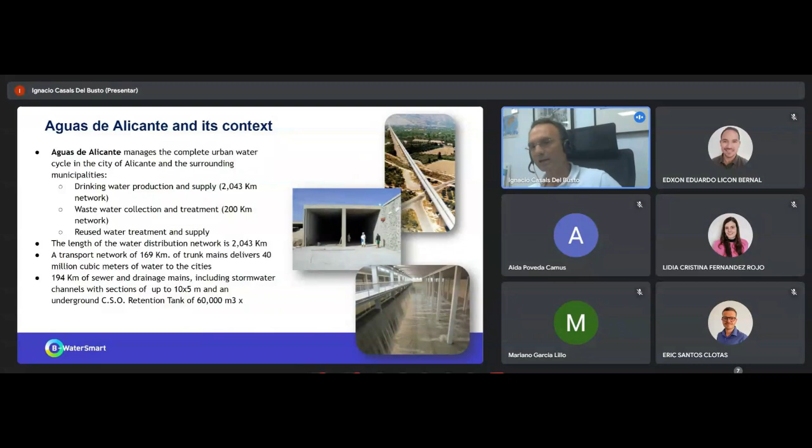The length of the water distribution network is roughly 2,000 kilometers. There's also a transport network of 170 kilometers of trunk mains, which deliver 40 million cubic meters of water to the cities. And there's a sewer network of more or less 200 kilometers of mains, including stormwater channels with large sections up to 10 by 5 meters, and for example an underground combined sewer overflow retention tank of 60,000 cubic meters.

In the B-WaterSmart project, we have focused all of our pilot efforts on the wastewater treatment plants. Alicante has two wastewater treatment plants. The Monte Orgegia plant in the south of the city has a theoretical capacity of 60,000 cubic meters per day, with an equivalent population of 200,000 inhabitants.

It has a conventional aerated biological treatment plus tertiary treatment for water reuse and disinfection. In the sludge line, it has anaerobic digestion and cogeneration, with a biogas production of 0.8 mega cubic meters per year, and it produces 11 hectometers cubic of water per year of reclaimed water.

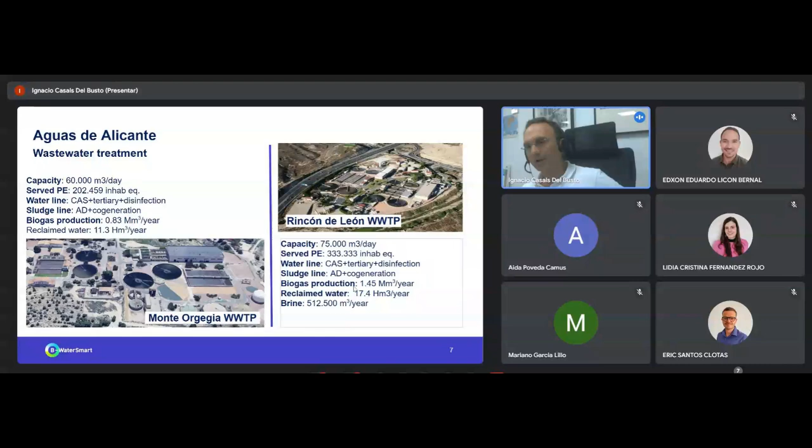Especially in the case of the wastewater treatment plant of Rincón de León, we have the goals of increasing both the biogas production and the reclaimed water production in the next years.

In the context of the B-WaterSmart project, the Living Lab of Alicante focused on some specific goals. The first was innovative treatments for the promotion of water reuse for more efficient and safe operation. The second was decarbonization and the production of green energy. And the third was getting added value by producing added value products in the wastewater plant.

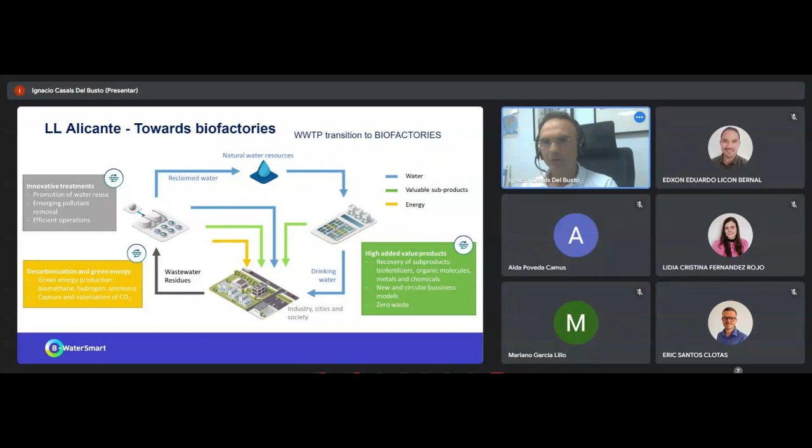That is, in brief, what we call the transition from wastewater treatment plants to biofactories—from waste treatment to value and resource production. We will come back to these objectives later on.

But first, I would like to say what has already been done on this path to the biofactory or ecofactory in Alicante. Well, first of all, water reuse is key for us. It started as early as 1996, and currently, as I mentioned earlier, in Monte Orgegia we are reusing more than 6 cubic hectometers per year.

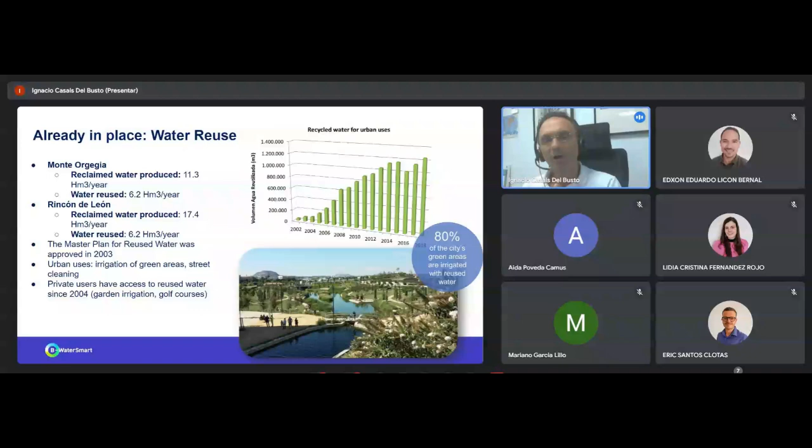And in the case of the Rincón de León wastewater treatment plant, sorry—I think that, I don't know if this figure is correct, but a similar amount of reused water.

As for the case of urban water reuse, the master plan for reused water in Alicante was approved in 2003 and is currently being used for irrigation of green areas, street cleaning, and also for the cleaning of the wastewater network. Additionally, private users have had access to reused water since 2004 for garden irrigation and golf courses. Currently, 80% of the city's green areas are irrigated with reused water, and in the last decade, the surface of green areas in the city has tripled.

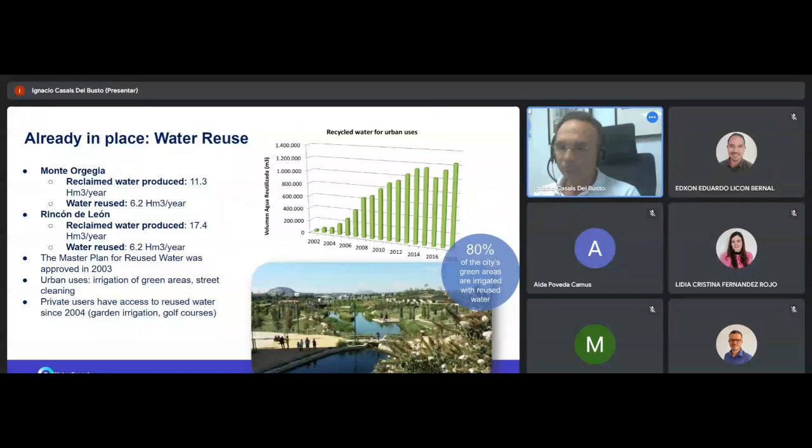Also, currently in place in Alicante, biogas production in both wastewater treatment plants. In the case of Monte Orgegia, we are producing 0.8 mega cubic meters per year, which allow us to produce 1.5 gigawatt hours per year. That means we currently have a self-sufficiency or self-consumption of 35% in terms of energy.

And as for the Rincón de León wastewater treatment plant, we are currently producing 1.5, more or less, mega cubic meters per year, which allow us to produce more than 2 gigawatt hours per year. The result is currently a self-sufficiency rate of 25%, which will be increased in the next years.

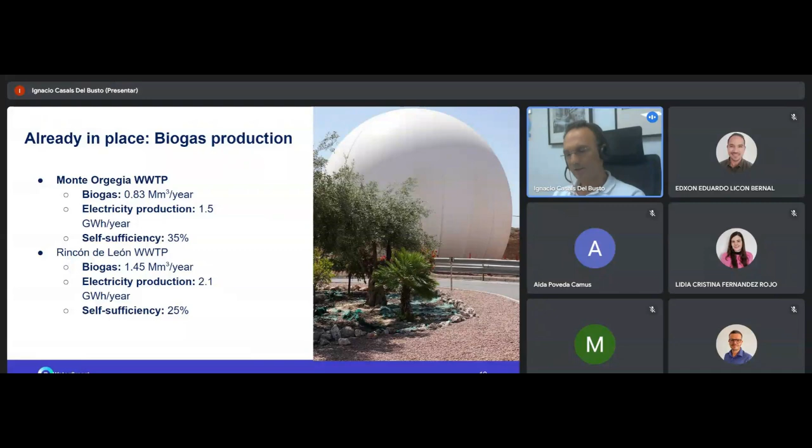Finally, I would like to mention the energy recovery from sewage sludge, and this is especially important for today's presentations. In brief, we are drying the wastewater sludge by making use of the waste heat produced by a nearby cement plant managed by Cemex. Then when the sludge is dried, we are using the dried sludge as fuel for the cement plant and also for agriculture use. Finally, the resulting ashes are used as a concrete component in the plant. This process allows us to save the equivalent to more than 9,000 tons of fuel and avoid the emission of 20,000 tons of CO2 to the atmosphere.

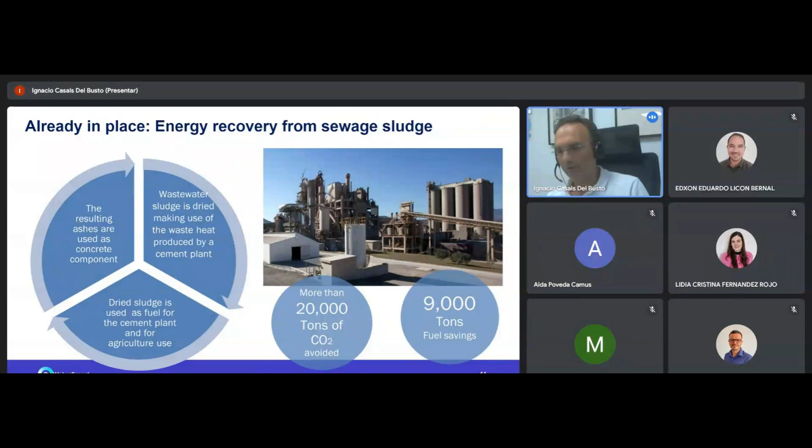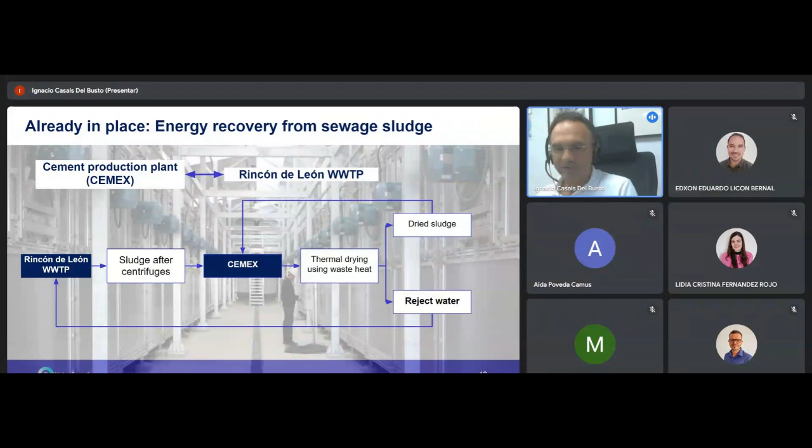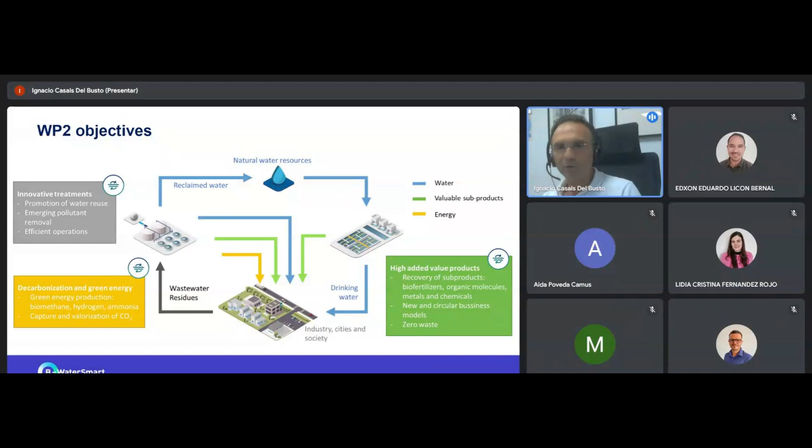So coming back to this slide I already showed, I will show you again.

These are the technologies that have been tested in Alicante within Work Package 2, the package in B-WaterSmart related to technology development. The first one was devoted to the valorization of oils, fats, and food waste to produce biogas. The second technology was related to energy recovery from the wastewater outlet with microturbines. Then we had a pilot on brine valorization for water reuse and the production of byproducts. And finally, we had the pilot on nutrient recovery.

So the relationship of these pilots with the objectives selected in the living lab of Alicante is the one you can see now in this slide. Brine valorization was aimed at promoting water reuse and also a more efficient operation. There were two pilots oriented to decarbonization and the production of green energy: the microturbines, and the one on the valorization of food waste to produce biogas. And finally, the one we will be presenting later on, the nutrient recovery pilot, which was obviously related to the objective of getting high added value products.

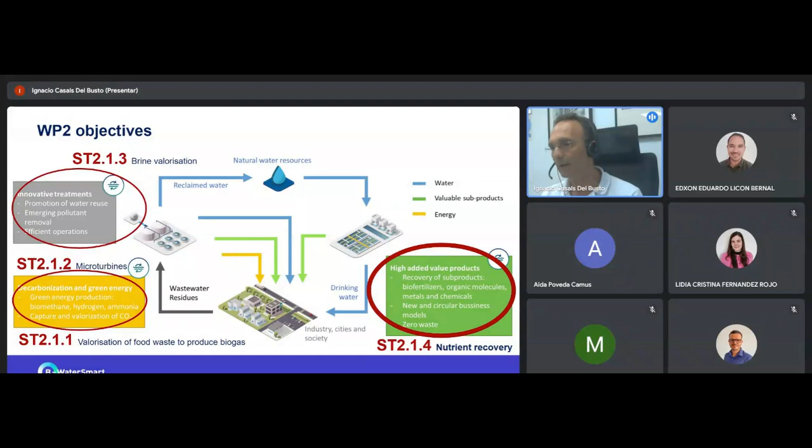So this is the current process flow in the wastewater treatment plant of Rincón de León, prior to the project. There were two treatment lines, one a bit older than the other, and in one of them we also have a process for water reuse in which we had a line with sand filtration, conventional tertiary treatment with sand filtration and ultraviolet disinfection, and on the other hand part of the flow was treated with ultrafiltration and reverse osmosis. Both flows were then mixed to get the right water quality for water reuse. As for the sludge line, we had a thickening process, then the anaerobic digestion, and the mechanical dewatering, and then low temperature drying process.

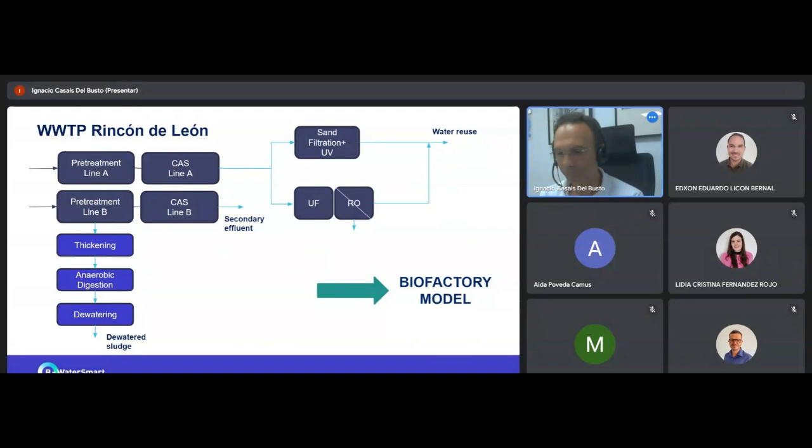But in the B-WaterSmart project, we have added the new processes you see now in light green in this slide. So after thickening of sludge, we added the co-digestion pilot. In the reverse osmosis process, we added a composed process of electrodialysis and electrochlorination to produce sodium hypochlorite. At the outlet, actually not in the outlet of Rincón de León, but in the outlet of Monte Orgegia, we inserted this microturbine to produce electricity, and the one we will be discussing today, the CEVAP technology for the valorization of ammonia.

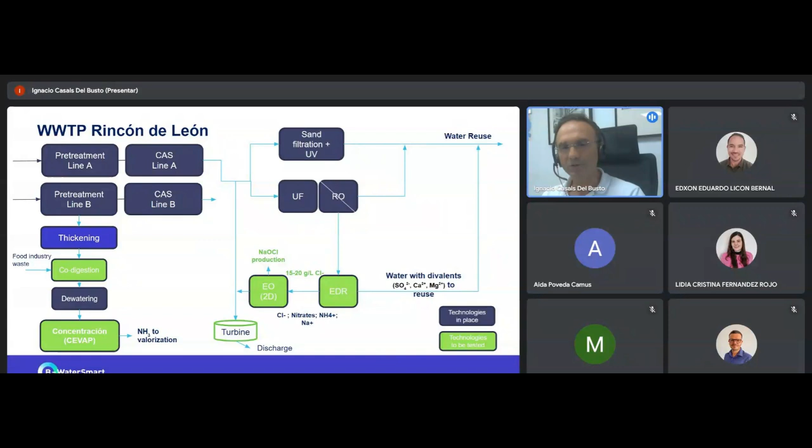So this is the last slide for me. And with this, I have finished my introduction of the Biofactory concept that has been developed within the B-WaterSmart project in Alicante.